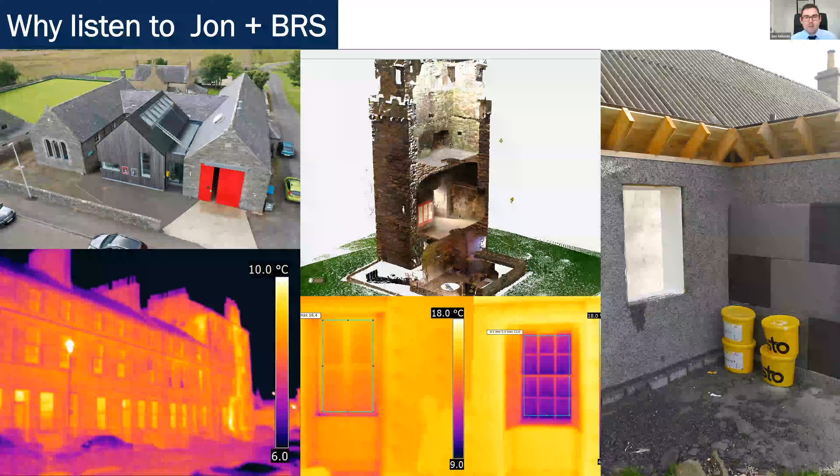Back then, most of our work was funded by Historic Scotland, and I've either directly published or provided the scientific data and results for the publication of what was the first 10 refurbishment case studies, and then 4 technical papers on retrofit methods for this archetype.

From all that early work we delivered to Historic Scotland, now called Historic Environment Scotland, myself and my colleagues at the Scottish Energy Centre at Napier launched the retrofitscotland.org knowledge exchange portal, which we built alongside Architecture and Design Scotland, BRE Scotland, and Historic Environment Scotland. All of my research on retrofit methods was used to launch the first wave of case studies on that site.

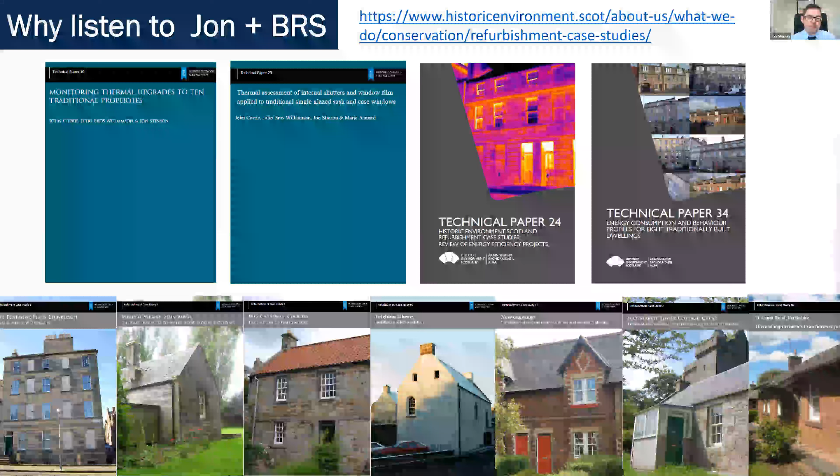Sadly, that site did die around 2017, 2018, which is a shame, but a lot of the content that was on that site now lives in the archives of the HES website, and the link is on the screen there, which I'm sure EdinBRIC will share with you all.

Last thing before I properly start the talk is I want to do a quick terminology check.

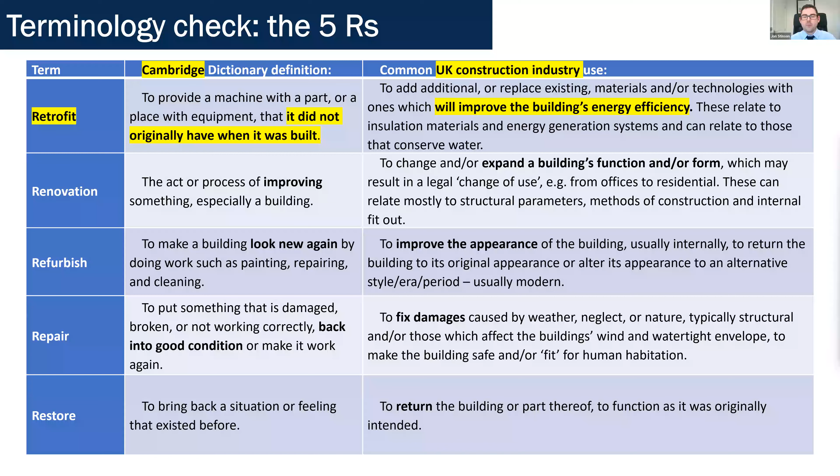You're going to hear me say the word retrofit a lot, and this is what I mean: to add additional or replace existing materials and technologies with ones which will improve the building's energy efficiency. These relate to insulation materials, energy generation systems, and can relate to those that conserve water. Now words like renovate and refurbish do appear to be used interchangeably with retrofit, but those three words and these 5 R's do mean different things. Ultimately it doesn't matter what definition you're using, as long as you know what I mean whenever I say retrofit for the duration of this talk.

Now moving into the actual topic of the talk, I want to cover 5 topics. First, the equilibrium and balancing of environments. I want to start by taking a brief look at the fundamentals that govern building physics. Then move on to energy balancing, which is gains and losses, where I want to do a quick breakdown on the types of thermal energy exchanges happening in our buildings with a very simple example.

Then water transfer and ventilation. I'll explain how thermal energy relates to hygrothermal, which is the movement of both heat and water, and where ventilation plays in all of this. Then I'll move on to data capture to inform energy efficiency retrofits, and we'll look at the different hardware that can be used to monitor pre and post retrofit performance. Then we'll finish off with whole building energy efficiency retrofit measures.

Now for time's sake this evening, I'm only going to cover thermal fabric retrofit measures, which is to say insulation materials, so I'm going to try and keep all of that to below an hour. Whilst I can and have spoken on this topic for hours and hours, what I'm about to say can be a lot to absorb, a lot to decompress and consolidate to a point that makes sense to you all. So I want to leave a good amount of time for questions and feedback.

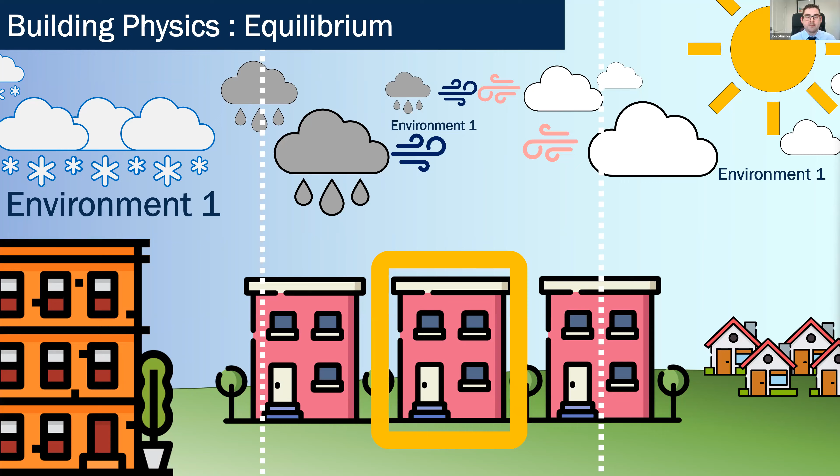So the external environment is in a constant state of flux because those three conditions are changing at various different rates and speeds during the day and during the year. Then when we create a building—by building, I mean we construct a floor, walls, and roof, and combine those together—we are effectively partitioning and enveloping a volumetric part of the external environment into its own separate environment, almost like a microclimate.

So if this building remains unconditioned, then the internal conditions will be very similar to, but will lag behind, the actions of the conditions in the external environment. This lag is usually in the range of a few minutes to a few hours, and the extremes typically aren't as high or as low internally as they will be externally. But the important thing to note is that the internal and external environments are in close equilibrium, and this lag happens because the walls, roof, and floor act as the wind and precipitation barrier, thereby reducing the effects of those large swings in the internal conditions.

Now, when we introduce people into our building, we create a need to further reduce these conditional swings in the internal environment, even further than if the building remained unconditioned. So we need to stabilize those internal conditions to create a more stable internal environment. So we artificially heat and cool this volume to compensate for what is happening outside.

So then we have created an internal environment that is very different to the external environment. So those walls, the roof, and the floor now take on a new role within our building. They are the building's thermal envelope. That's the building's thermal envelope's job: to manage the environmental differential between the internal and external conditions.

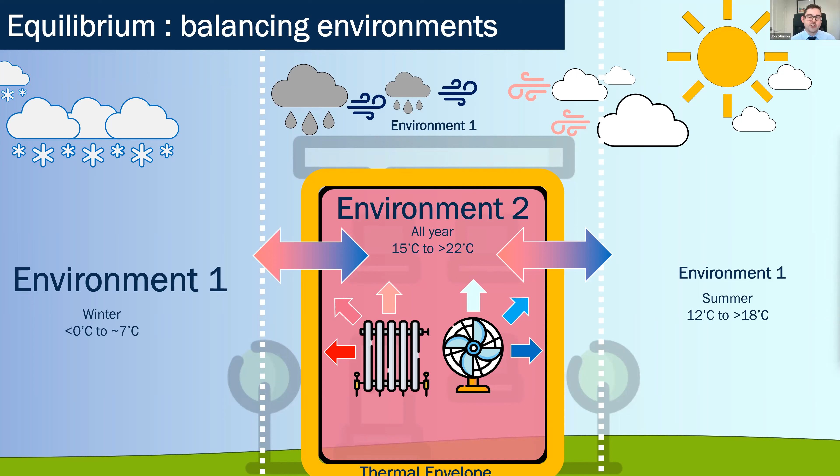Then as we subdivide the volume inside our envelope and expose it to various temperatures and concentrations of water vapor, we are effectively creating sub-environments. Now, when an environment is divided—which includes a physical division, like an internal wall or floor, and also a conditional division, for example a bathroom and a bedroom will experience different levels of temperature and RH at different times.

They then work to balance any variations in temperature, air movement, and water vapor across those physical divisions, which are your internal walls and floors. So each of our sub-environments is now also in a constant state of flux, trying to balance temperature, air movement, and water vapor across the indoor environment. And the whole internal environment is trying to balance with what is happening in the external environment.

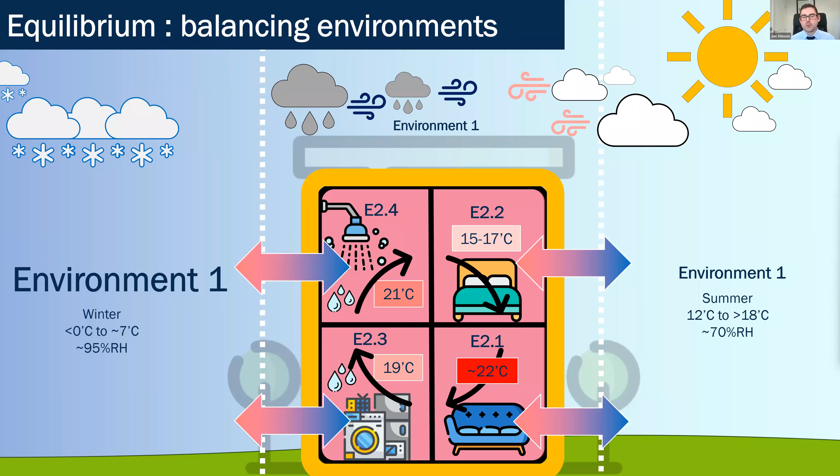So it's up to our building's thermal envelope to buffer this balancing in a way that suits our agenda. Our agendas typically mean we're trying to circulate foul or bad air from concentrations of human existence with fresh external air—what we call maintaining respiratory comfort or good indoor air quality—reducing the fuel used to change internal temperature from external temperature to maintain thermal comfort, and preventing conditions for germination of mycelium spores, which is to say surface condensation and mold growth.

So this fundamental part of building physics is agnostic to any type of building. The principles apply to new build construction just as much as to the retrofit of existing buildings. The main difference is that before you retrofit an existing building, its thermal envelope has been managing the internal conditions the same way for the last 5, 10, 50, or 100 plus years.

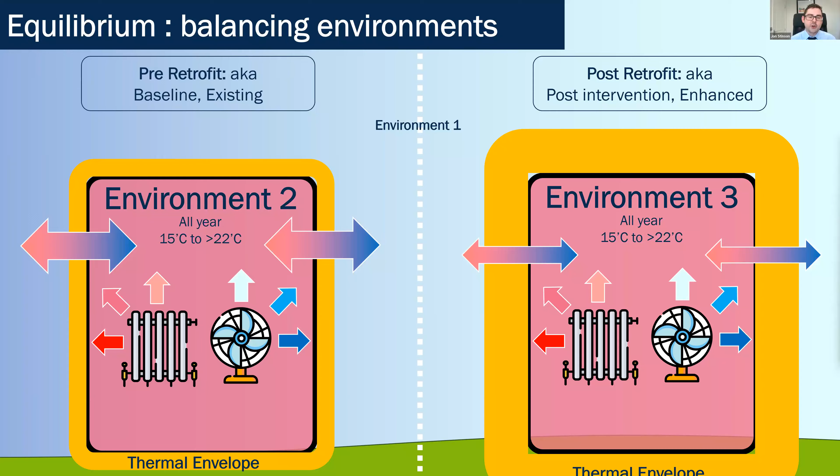When you alter or add any material to that building's thermal envelope, you're fundamentally changing how that thermal envelope now manages and buffers the harmonization of the internal environment to the external environment. So with that covered, I now want to look at balancing across our building's thermal envelope. We'll start by talking about energy, which refers to thermal energy.

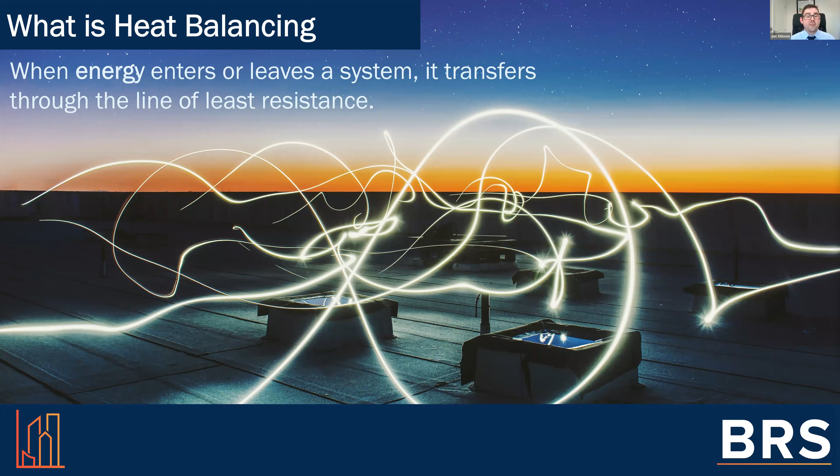The first thing to note about thermal energy is it's a form of heat. And like all energy exchanges, when heat energy enters or leaves a system—or a building in our example—it transfers through the line of least resistance. So it's often good to think of heat like electricity: electricity will jump around insulators to connect with other conductors, and heat, and in fact water vapor, behaves in a very similar manner. It will travel the line of least resistance.

So balancing is about reducing active heat generation, which is to say reducing the amount of heat generation from a boiler or a heater. With that in mind, balancing means minimizing heat losses through the building's thermal envelope and maximizing heat gains—this is known as passive heating. If you're familiar with the term passive house or EnerPHit, this balancing to minimize losses and maximize gains is the founding principle of passive house and EnerPHit, but it is not exclusive to that movement—it is in fact the basis of all building physics.

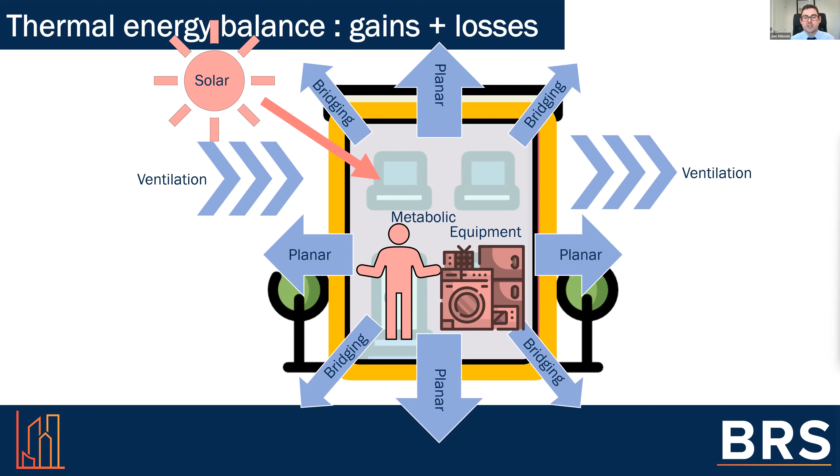So for heat loss, we can categorize these into three groups: planar, bridging, and ventilation. Planar heat loss is heat loss through the internal surface of the thermal envelope—that means the temperature difference from inside to outside through your walls, ceiling, floor, and closed windows and doors. Bridging heat loss is similar to planar, but it's the temperature differential through corners, joints, and junctions at the point where your planar elements change.

For example, it'll be a corner between a ceiling and a wall, or a joint where a wall turns into a window. Ventilation heat loss is most likely the one we're all most familiar with, because it's often referred to as a draft.

Because of that, ventilation heat loss is often seen as being the bad guy, meaning that ventilation heat loss is almost always incorrectly considered as something that we must stop, rather than something that needs to be balanced to maintain adequate air change rates for good indoor air quality.

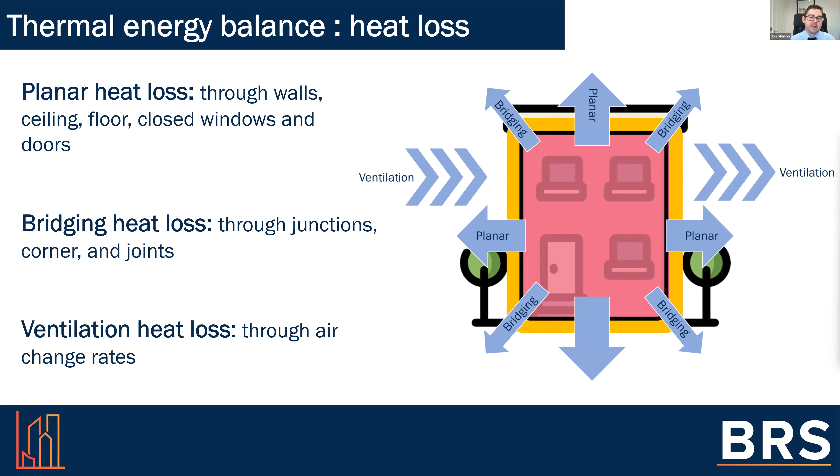But we'll come back to air movement in a few moments, and we'll talk about the difference between regulated and unregulated ventilation heat loss. I wanted to have a cool little infographic to describe what I'm about to say, but this matrix was the best way to articulate this next piece of information. So this slide and the next one are a cheat sheet on how to think about and consider these three heat loss pathways.

Planar heat loss is a function of the surface area in your home or building, and it's what the construction industry calls a U value or a thermal transmittance value. Be careful with that terminology, because I've seen websites, blogs and articles, even from official construction companies, use the word thermal conductivity or thermal resistance when they actually meant thermal transmittance. Those three words are related, but they aren't interchangeable and they do mean different things.

Bridging is a function of linear length, like the length of a junction between, say, your wall and your floor. This is often called thermal bypassing, and it has two metrics: one is called a psi value, and the other is called a temperature factor. Importantly, the temperature factor is an indication of the risk of surface condensation.

And ventilation heat loss is a function of the home's internal volume. This one has a whole host of different names, is referred to in different ways, and has different units of measure. But essentially it's measured as either air change rates per hour or air permeability through your building's thermal envelope.

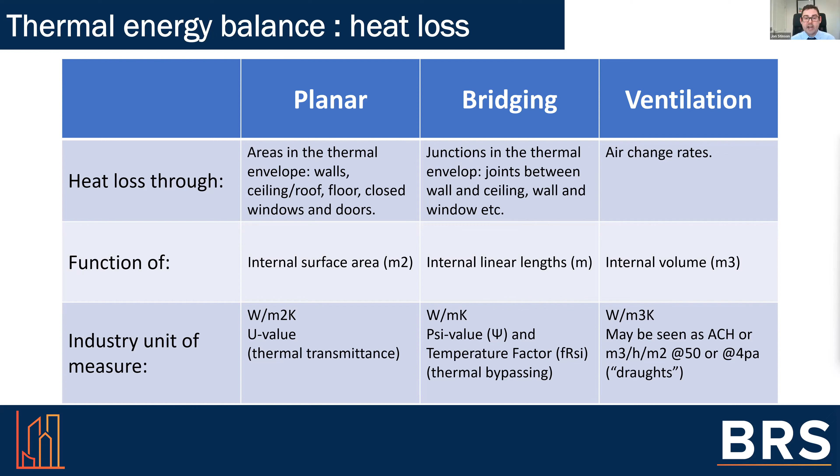Planar U values are calculated by designers or retrofit installers using software. Now, this, like almost all calculated values, can be measured by building performance evaluation hardware, which we'll talk about very soon. The way to improve planar heat loss, or reduce the U value, is to add an insulation layer to that element. We're going to talk about these insulation layers and where to add them in a moment, but for the purpose of this slide, adding an insulation layer would be like adding internal wall insulation, ceiling insulation, or secondary glazing.

Bridging heat loss, or psi values and temperature factors, are calculated in pretty much the same way as U values: you have your retrofit professional using specific software. Temperature factors, but not the psi value, can be measured just like U values, but it's measured using an IR camera, an infrared camera with surface temperature sensors.

The way to improve bridging heat loss is to ensure that the planar insulation overlaps between elements, so your internal wall insulation and your ceiling insulation, making sure they overlap as much as they can. This is much easier said than done, which typically means the bridging part of the heat loss trio is usually overlooked. But you should know that bridging must at the very least be considered. This is something you can raise with your chosen construction professional when the time comes to retrofit your home or building with thermal materials.

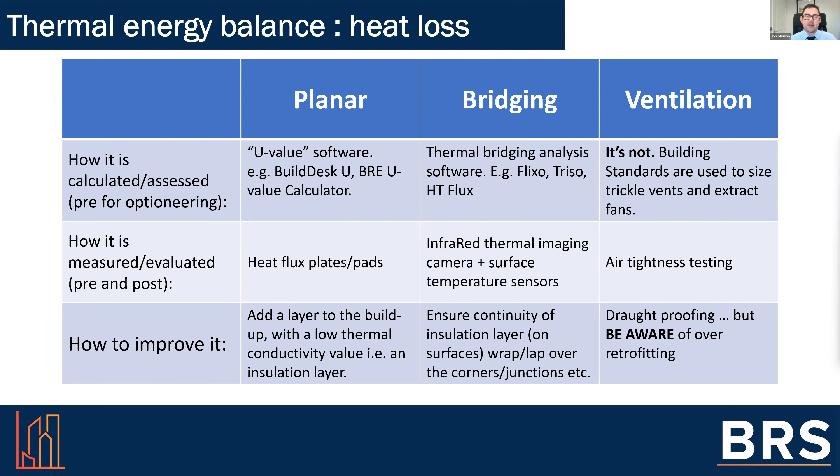The important thing to take away with these three heat loss pathways is that changing one will affect the others. For example, if you improve the planar U value of your ceiling but not the wall, this will increase or make worse the psi value for the corner, which is the rate of heat loss through the junction between the wall and the ceiling. So improving all three heat loss pathways together at the same time, which we'd refer to in the industry as a whole building or whole house retrofit, is now the only logical way to move forward.

So importantly, when addressing heat losses, you need to also be conscious of heat gains. Heat gains, much like heat losses, can be broken into three categories: metabolic, solar, and equipment.

Metabolic heat gains are heat from our bodies, or any warm-blooded animals in the building. Solar heat gains come from the sun through your window. And then we have various equipment heat gains, which include cooking, lighting, fans and pumps, and latent gains from water heating, like the pipes that connect your boiler to your taps.

We have direct and indirect equipment heat gains. Direct would be something like your oven whilst you're cooking, and indirect would be something like your fridge and freezer when it dumps out a lot of heat during its cooling cycles.

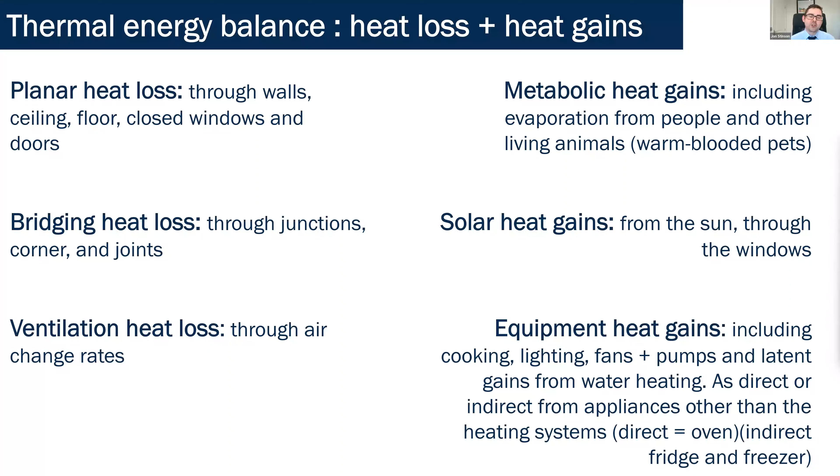I want to apply this knowledge to a retrofit example, and demonstrate the balancing between heat losses and heat gains. Here I'll be using the U value for heat losses and solar for heat gains, because typically solar is the only thing we can really have any effect on for existing buildings.

In this particular project, the secondary and triple glaze systems have the exact same U value, so they have the same heat loss value, which is 1.7 watts per meter squared Kelvin, if anyone's interested. And that is very low, by the way—very good value to get.

The difference here is that the total solar energy transmittance, or g-value—a measure of how much solar heat energy passes through the glazing, used for calculating solar gains—was different. Whilst they had the same U value for heat loss, the secondary glazing system had a g-value of 0.76, and the triple glaze system had a value of 0.57.

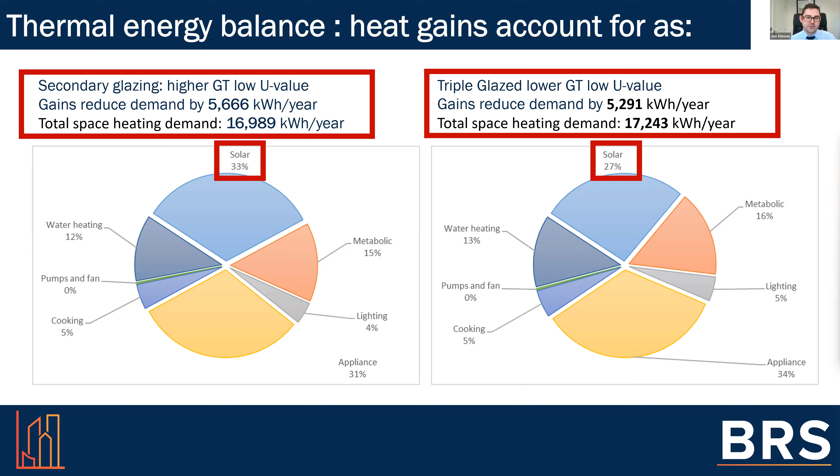Now, I probably know what all of you are thinking. You're thinking, okay, solar gains versus window heat losses—that's only really part of the picture. And you're probably experiencing this right now in your homes or buildings. You're right. So this begs the question: what about overheating?

There was a simple calculation method that considered the building's heat losses and heat gains over the three summer months to predict the risk of internal temperatures going over the external temperature threshold. Much of that has been replaced with complex, expensive dynamic simulation modeling, and now we typically use the value of 25 degrees. If the building goes over 25 degrees for a period of time, it's said to be experiencing overheating.

But what does that mean for retrofit projects? Well, it means that we should be focusing on the term thermal comfort as opposed to overheating.

You're well within your right as a homeowner or occupant to ask your retrofit construction professional for an overheating risk assessment or a thermal comfort assessment, which will include the assessment of the dwelling's internal surface temperatures. And this is where thermal mass starts to come into the topic.

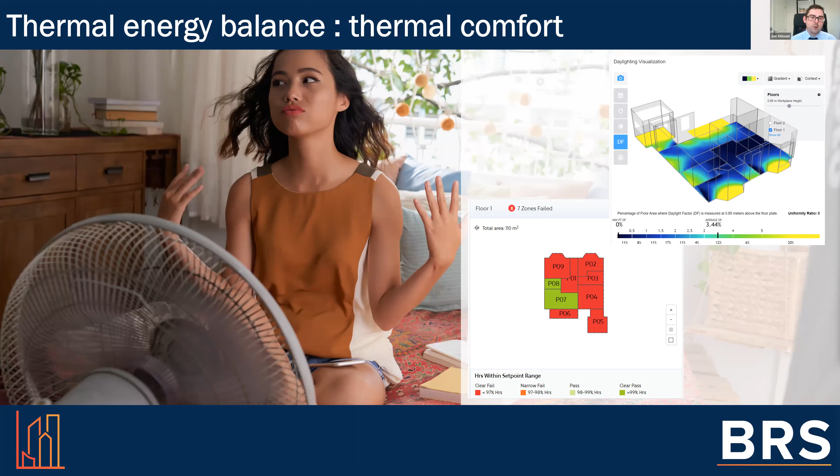For existing buildings, especially those constructed with mass masonry, they often get a bad reputation for being hard to heat. The better term is probably hard to keep warm. So if you have a building with high levels of thermal mass, that means it was constructed using mass masonry, things like stone, concrete, or concrete blocks.

These materials can act like a heat sink or thermal sink, which means that the core of those elements, like a solid internal stone wall, can absorb large amounts of heat from the ambient air around them, which in turn will create, for a time, lower surface temperatures.

That wall, until the whole wall reaches the same temperature as the ambient air around it, will feel cold. So when you sit close to a mass masonry wall, specifically internal ones, that has a low surface temperature, that heat sink will absorb metabolic heat from your body much faster than other objects in the room, like your fabrics and furnishings. This often translates into feeling cold near that surface.

That accelerated heat transfer between your skin and a cold surface can happen at such a rate that most people mistake that radiant thermal exchange for convective thermal exchange. So lower surface temperatures are very easily mistaken for being a draft. And then when someone feels a draft, what tends to happen? Out comes the draft proofing foam, the tapes, the sprays, which is very dangerous. We're about to come on to that topic real soon.

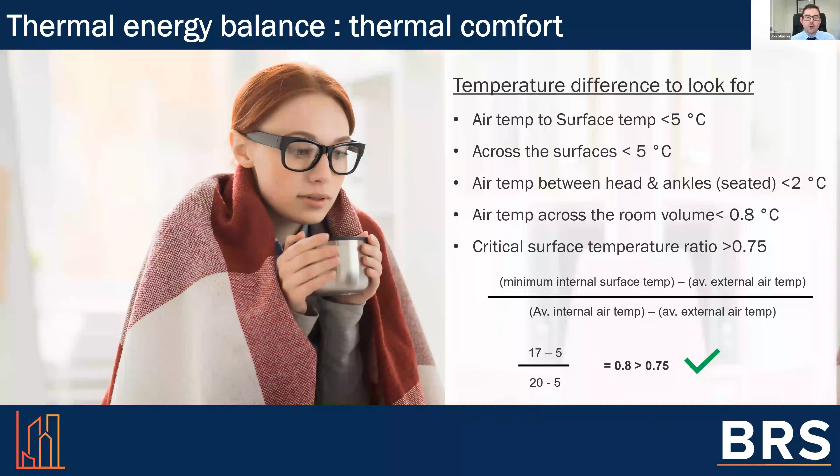Okay, so that's overheating and the importance of thermal comfort, but what about underheating? Building physicists have always been deeply concerned about the detrimental impacts that fuel poverty has on a building's well-being, and often the catastrophic and eventually fatal effects that fuel poverty has on the occupants. But I want to talk about unconscious underheating.

This comes down to building physics versus its cousin, building economics. I'm not an economist, but I do pay my energy bills, and that's the only qualification you need to understand this next part. This data comes from a simplified version of what we had done recently with an Edinburgh tenement flat, mid-floor, in Edinburgh's New Town.

Let's say that it had a space heating demand of 15,000 kilowatt hours per year. That's pretty respectable for a building of this archetype. So that dwelling needs 15,000 kilowatt hours a year of heat energy to achieve, A, the occupant's thermal comfort, and B, to keep the dwelling's thermal envelope healthy. That means keeping the levels of relative humidity of the air down, and keeping the levels of surface temperature on the internal surfaces up.

So let's say this flat is gas heated, which it was, and let's just use a simplified tariff. Let's select 5 pence per kilowatt hour as the tariff. Now, to generate that 15,000 kilowatt hours per year, they were paying £750 a year. I've just ignored standing charges here for a moment.

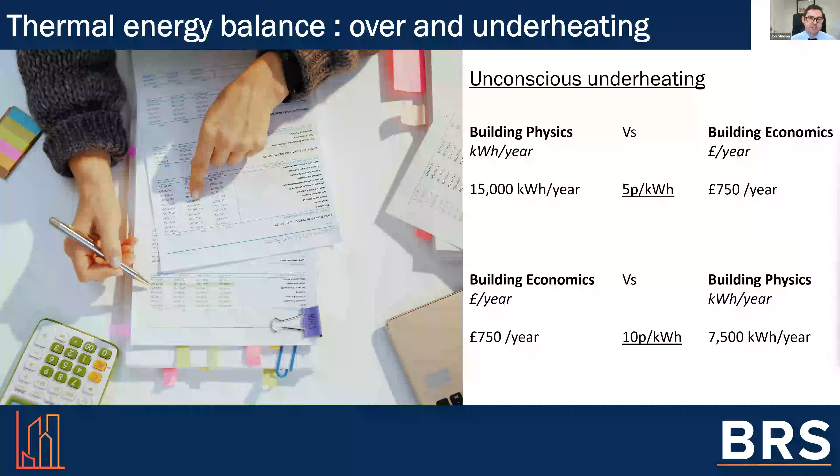But how do we know when we need to dehumidify our air, or get an air purifier, or have more or a different type of ventilation system? Well, that brings me nicely to the next section of this talk, which is water transfer and ventilation.

So I want to start just to kind of demystify the process. There's a lot of myths going around about water vapor. I want to start with a few scientific facts. So water exists in two of its three forms, most commonly, in our homes and in the materials that we've used to construct our homes.

Now these two forms are liquid water, which is oftentimes called moisture, and water vapor, which is also oftentimes called moisture. Every porous material in your home, for example timber, brick, plasterboard, lath and plaster, stone, will have some level of liquid residing within its cells or its pores. Now this is called the material's moisture content. And that moisture content will vary. Sometimes it will vary on an hourly basis, sometimes on a monthly basis. But whether we like it or not, the levels of moisture content will vary in our building's material.

Next, water vapor is often assumed to be only steam, like from boiling water, and that it only moves during times of high energy exchange, like for example when the shower is on. Now that's only partly correct.

So the water vapor I want to refer to this evening is both the high energy steam variety, but also the low energy water molecules that are always all around us.

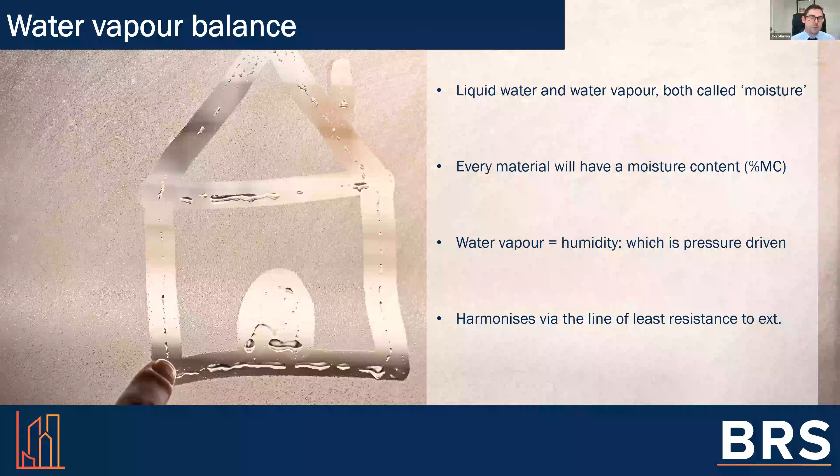Now that internal water vapor only has one route in order to balance with the external, and that is through the building's thermal envelope. And that is not a route that you want the internal water vapor to take.

This brings me on to the phase changes of water, specifically moving from vapor to liquid. Water vapor does not want to undergo those kilopascal pressure changes to get through a bunch of materials, but it will do if it has to. So for example, if the ventilation strategy or system has failed, or over retrofitting or over draft proofing has compromised the dwelling's ability to balance the levels of internal and external water vapor in the air, then water vapor will push its way through the walls, through the ceilings, and through those joints and junctions in order to balance or harmonize with the external.

It's going to happen whether we like it or not. But the important thing to note is that the levels of water vapor will travel through your thermal envelope at different rates compared to how heat will travel through your building's thermal envelope. So if at any point in the heat and water vapor's journey through the wall, for example, from the inside to the outside, the rate of those two differs significantly - and by significantly I mean the rate of heat transfer is faster than the rate of water vapor transfer - then the water vapor will condense into liquid water.

Now, if that happens on the very first layer of your thermal envelope, so for example your lath and plaster internal surface of the wall, that is what we would refer to as surface condensation. If that condensation happens somewhere between the wall's internal and external surface, that is what we call interstitial condensation.

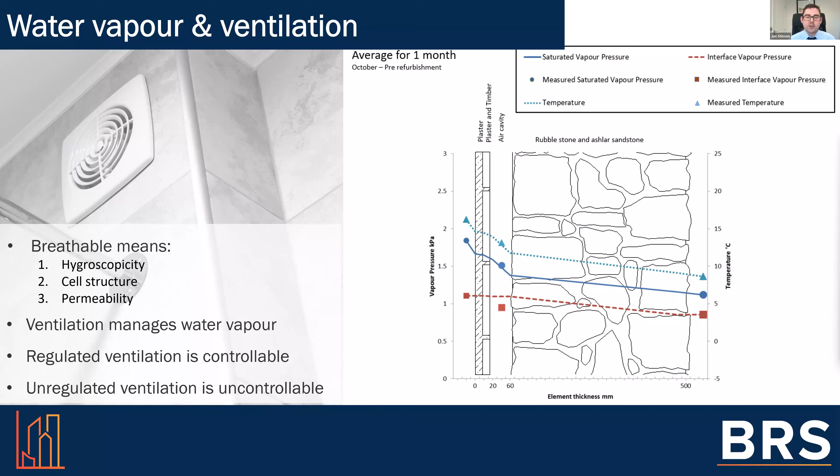What can you do to inform your decisions and to give you the power over decision-making for thermal retrofit projects? Well, as is almost always the case, knowledge will give you that power, and the knowledge typically comes from the data. So now I want to move on, to wrap up this talk, to talk about the types of data that you can get, and that your construction professional can more readily get, to better inform any retrofit decisions.

Now here I want to very quickly cover the cheap and cheerful hardware that you can use, along with the scientifically calibrated hardware that you should expect your industry professional to come in with.

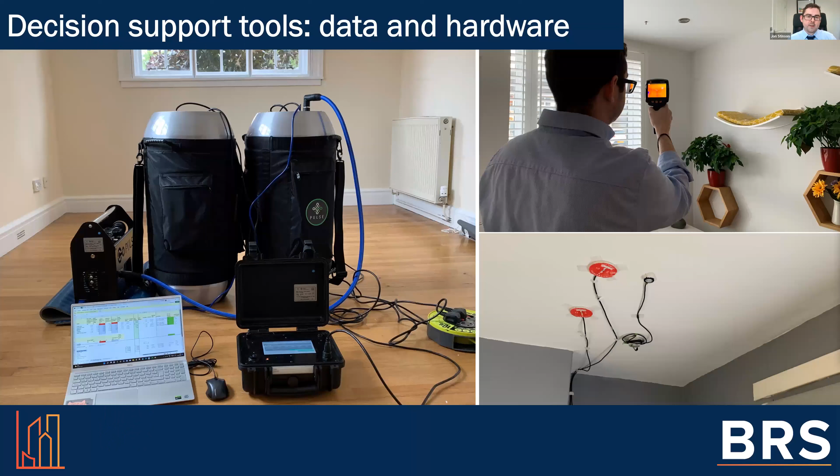So the terms we'll be using here again are pre and post retrofit, and that just simply means before and after any thermal insulating material is added. So we use the term measure to capture a single point in time value, like an IR camera or moisture content meter. And we use the term monitor to capture values over time, like temperature, relative humidity, internal thermal comfort conditions, etc.

But why measure? Why go through the whole rigmarole of getting data? Well, first, the pre-retrofit data gives you and your construction professional a baseline for the hygrothermal and ventilation performance of your building, which acts as a benchmark that the construction professional can use to calibrate digital models of your building, which is used to shortlist a selection of retrofit measures and which greatly assists with the specification of the optimal retrofit solution.

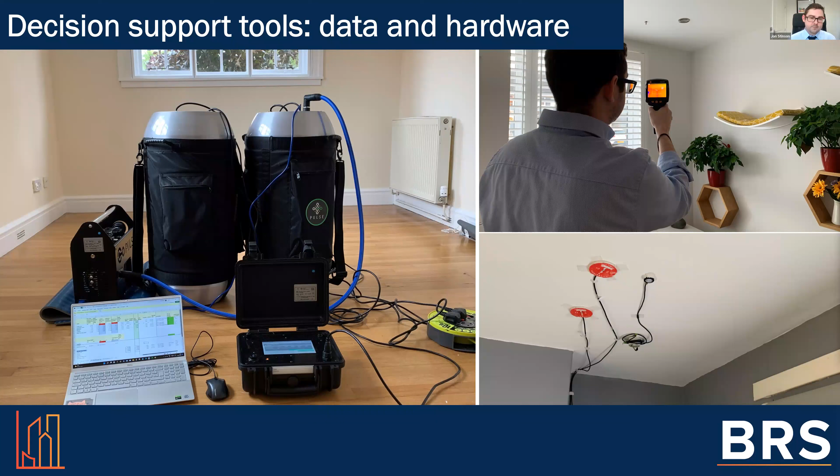This whole process is what we call de-risking the retrofit process. Secondly, the post-retrofit data gives you values to compare to the baseline or pre-retrofit values. This will let you quantify the impacts of the money you've spent, but these data sets can also provide vital, canary-in-the-mine-shaft type insights.

It'll let you see as early as reasonably practicable if something untoward is happening. After retrofit, it takes time for sub-environments within your internal environment to adjust to changes made to the building's thermal envelope. So if something bad is happening post-retrofit, you want to detect that as early as possible so you can address it before too much damage is done.

So how do we measure? Lots of hardware is typically the answer. Some of that hardware is cheap and cheerful and super intuitive, and some is very expensive and requires specific training and deeper knowledge of building physics and apparatus. For the purpose of time, I don't want to go through all the processes and costs of this equipment, but I do want to simply say that there is low-cost equipment and free-to-access citizen scientist type websites that allow you to start measuring the baseline of your existing building.

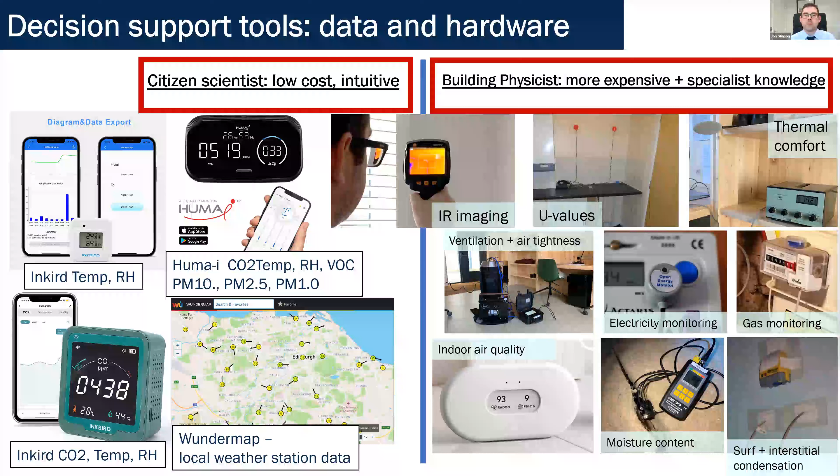I've just labeled these so you know it is possible to measure these things. So this equipment, it's not new, it's not innovative, it's not expensive. From a construction professional perspective, it's not expensive for them to bring in some of this hardware to help alleviate some of your concerns or some of the risks.

So the take-home message for this section, again, is: do not rush to retrofit. Get the data, create a baseline, satisfy yourself that you're investing in the right retrofit measures. Make sure the building is ready to retrofit. This could mean removing some of the earlier retrofit works or repairing and restoring something before any new material is added. Carrying out maintenance and repairs is often a very essential first step before you retrofit anything.

Don't be afraid of the data. And if you are uncertain of the data, do find a construction professional with retrofit experience and building physics knowledge to talk you through what that data means, which then brings me nicely to the final section of our talk.

Which is whole house or whole building energy efficiency retrofit. Now here, I'm going to very briefly set out the location and types of thermal retrofit measures that we can add to our existing buildings, and importantly, the things you should be aware of when considering some of these measures.

Now, what you're about to see is not an exhaustive list, neither is it a list of specific products or brands. It's down to your research, or down to your construction professional to do that research, to make sure the right brand or product is selected.

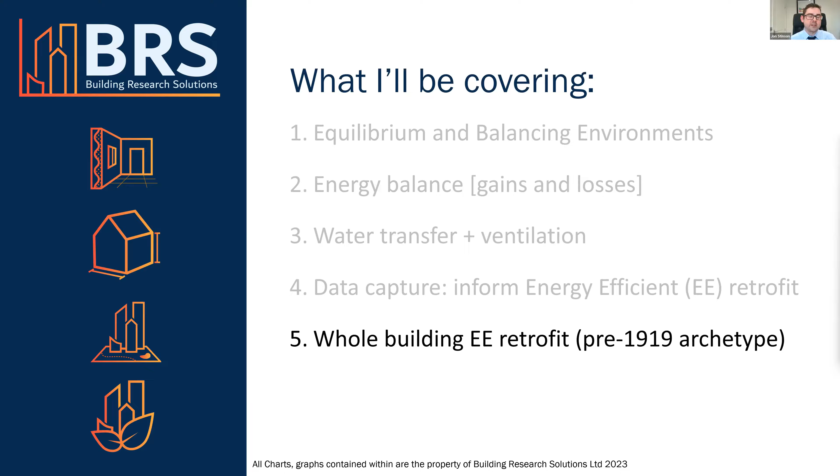But in the interest of time, and because I don't want to go into specifics too far, I'm going to keep the advice here a little more generic than I otherwise would like to. So, last couple of slides - let's start, as many of us do, with draught proofing.

So, things to be aware of: for pre-retrofit, do you currently experience overheating in the summer? If so, then post-retrofit those levels could get worse. What are the pre-retrofit air change rates? Are they just above adequate? If so, post-retrofit those levels of air change rates are very likely to drop and get worse, which means the post-retrofit air change rate could compromise certain retrofit measures.

For example, internal wall insulation and secondary glazing can be particularly sensitive whenever the air change rate drops below adequate levels. So you do want to see results from a pre and post air permeability test, to confirm that what you've paid for has indeed reduced the ventilation heat loss from the unregulated ventilation pathways, but also that the air change rates have not reduced to hazardous levels for either you or the building.

Now, for ventilation systems, you have your passive natural ventilation, which is pressure driven by the wind. So it's very dependent on if the wind is blowing, how fast it's blowing, and where it's coming from. That particular system may not be sufficient to deliver adequate air change rates post-retrofit, which means the building is in danger of being over-retrofitted.

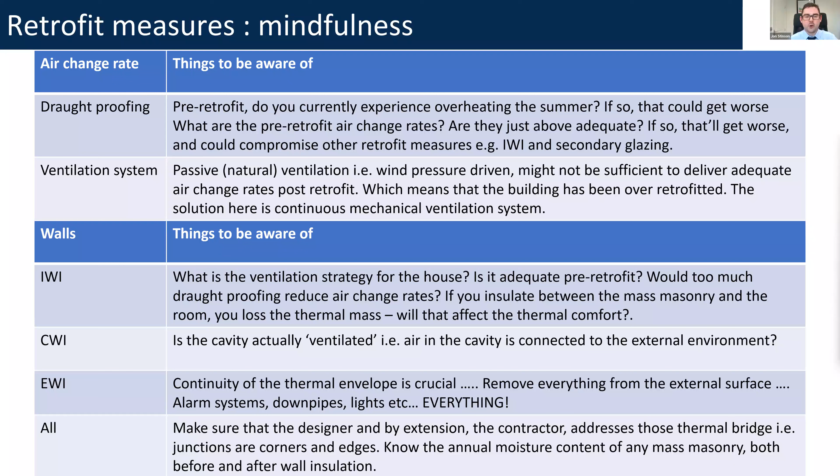For all wall insulation types, do make sure that the designer, and by extension the contractor, addresses those thermal bridges, those junctions around your corners and edges. What you do want to see is those IR thermal images pre and post, and you really want to see those temperature factor values for those thermal bridging locations, because temperature factors are a vital assessment of the risk of surface condensation, and they can be both calculated and measured.

Doors, very quickly, solid doors, things to be aware of. Whenever you're insulating the inside surface, which is typically where door insulation is added, things like letter boxes, hinges, door locks, and the swing can be compromised. For doors that are wholly or partly glazed, make sure the window gets considered, and secondary glazing is pretty much a good application of the technology to glazed doors as well as windows.

As for windows, things to be aware of for all windows: if you can and you want to replace the window, be aware of that relationship between heat losses, which is the U value, and heat gains, which we spoke about earlier. If the window is worth keeping, or keeping it is non-negotiable, then repair and restore as much of the original window frame and the mechanisms as possible.

For glazing, things to be aware of: you want to decide if you want to improve just the glass, using things like low emissivity film or thin stick-on polycarbonate double glazing on each pane of glass, or if you want to treat the whole opening with comprehensive secondary glazing. For any system, be aware that you'll need to clean and maintain those windows at some point. Treating the whole window, for example with comprehensive secondary glazing, will improve the U value of the entire opening, including the glass, the frame, and any unwanted unregulated ventilation heat loss pathways, where glass-only solutions will not.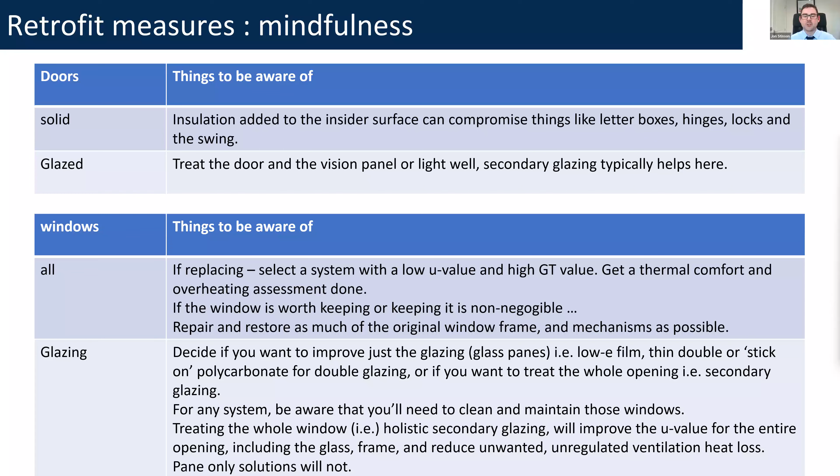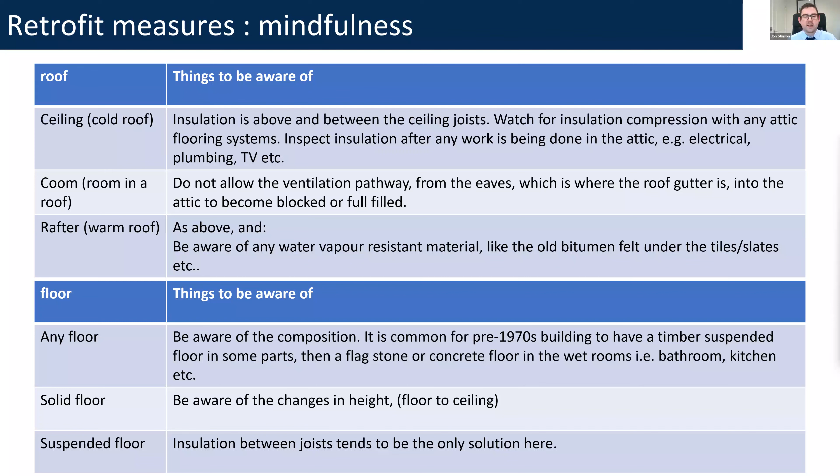For solid floors, if you have to add insulation to the surface, be aware of any changes in height - that will affect things like staircases and doors. For suspended floors, insulating between the joists under the floorboards tends to be the only solution, and it can be quite troublesome and costly.

Right, last two slides: post-retrofit evaluation. You have your pre-data, something's been installed, now you're doing your post-data. What are you looking for? When you compare your post-retrofit data to the pre-retrofit data, increases in anything is typically bad. So increases in ambient internal air temperatures, bad. Increases in internal relative humidity above 70% RH for long periods, bad.

Internal CO2 above 1,000 to 1,500 parts per million for prolonged periods, that's bad. Internal particulate matter 2.5 levels for prolonged periods, that's bad.

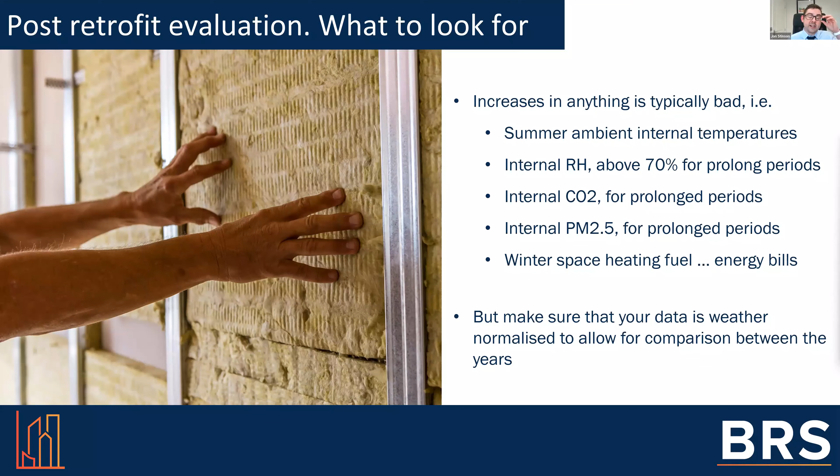Water heating systems, winter heating, space heating fuel - if that increases during your winter period, your energy bills increase, that's bad. Make sure that whatever data you're comparing is weather normalized for the year you're comparing, so you can do that safe comparison between the years. If that's something you're interested in, your construction professional can help with that.

Very last slide, the final take-home message. If you are in flatted accommodation, that can be more challenging for a thermal retrofit, specifically because your dwelling's thermal envelope will most likely include a wall and/or floor and/or ceiling that is part of your neighbor's thermal envelope. So when adding insulation to your own thermal envelope, you want a whole-building solution, including those junctions and joints - the thermal bridging points we spoke about earlier.

So this is typically the time to involve the collective and have those discussions with your neighbors to see what the most cost-effective method is.

Be aware of any construction professional that resists pre and post retrofit monitoring, and be aware of any who say, we don't need to measure anything, we know all there is to know about sandstone walls. Yes, they may know the theoretical performance of sandstone, but they need to know the specific hygrothermal performance and ventilation pathways of your home before anyone starts adding insulation anywhere.

You might be told that a proper retrofit building performance evaluation will cost money and time. It doesn't cost that much in the grand scheme of things, but it will cost time - some measurements can only be done over winter or summer. But thinking about the amount of time and money you're putting into the whole process, can you really afford to get the retrofit wrong? Especially with so many low-cost monitoring options that can de-risk the process before investing thousands or tens of thousands to put things right.